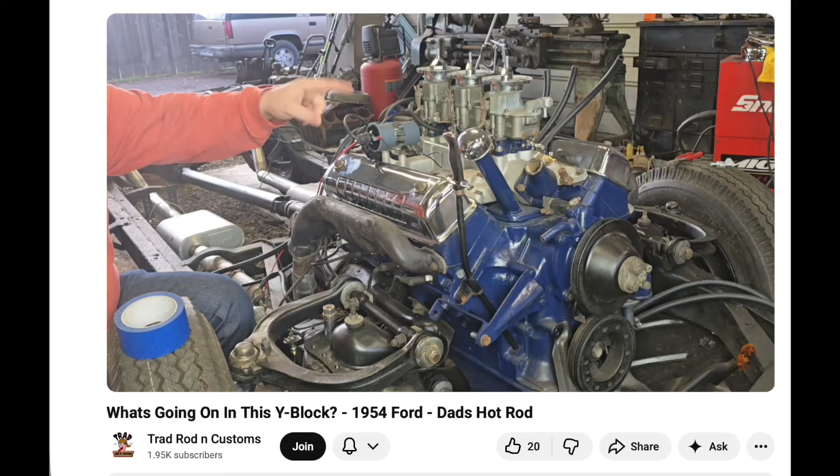That's the 239, 256, 272, 292, and 312. Maybe you've bought a truck or a car and you're trying to figure it all out. Recently, I had one of our subscribers that went through a lot of problems with the 1954 239 Y-Block he was working on. So what I want to go through is just some common issues you may run up against.

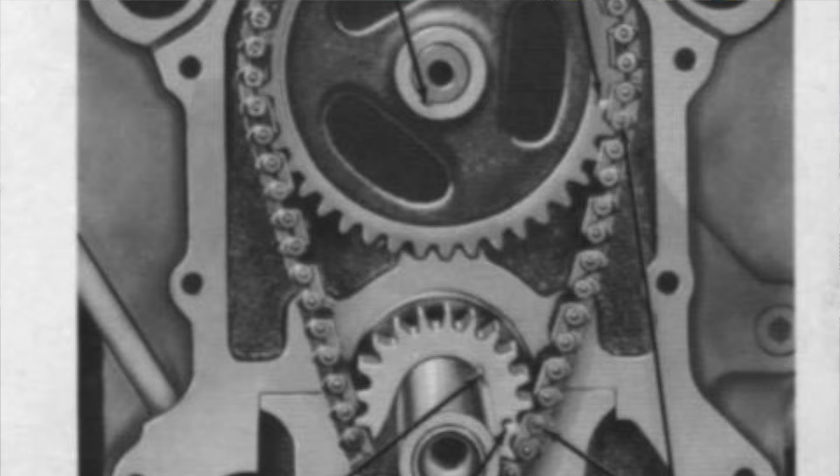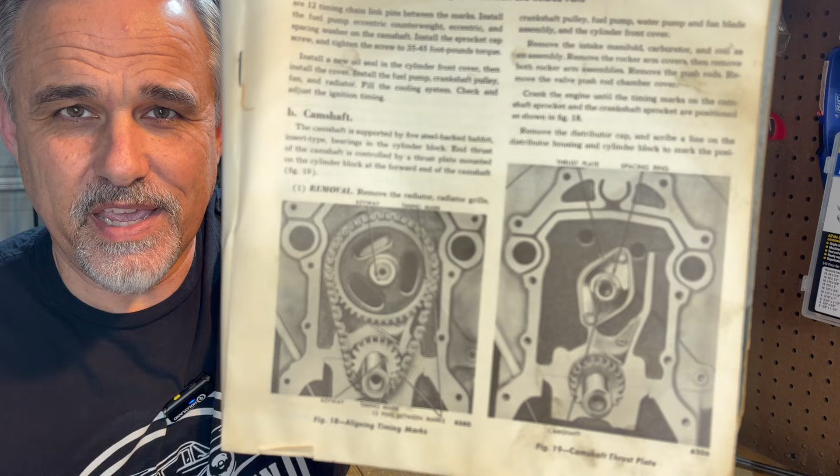Now, the first big issue with the Y-Block that a lot of people make as a mistake concerns the timing gear set. I've got a picture right here, and you can tell right there that the timing gears do not set up like a small block Chevrolet or like a lot of other V8s from the 50s, 60s, and 70s.

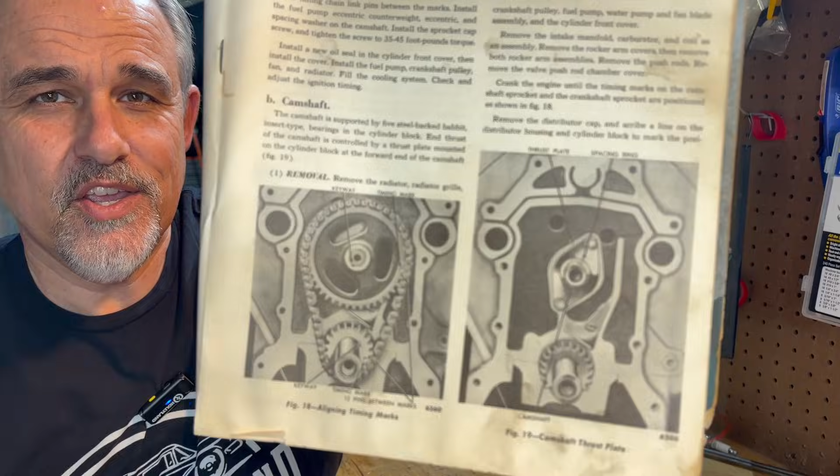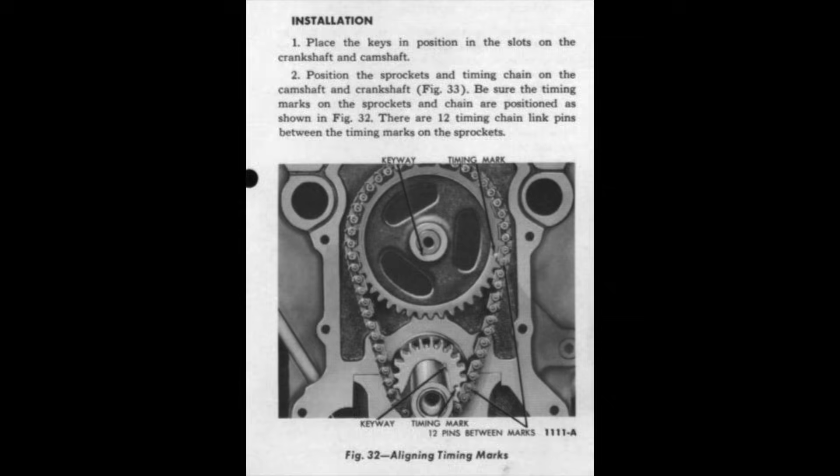You can tell where the dots are at here. Now, a lot of people will say that the camshaft gear needs to be at the 3 o'clock position. You can tell from this photo in the book that it's not exactly at 3 o'clock. It's really closer to 4 with the camshaft gear, but you can count 12 pins between the two dots, the crankshaft dot and the camshaft dot.

The mistake a lot of guys make, number one, they'll try to line up both of the dots to each other, and that's a big mistake. Second problem is they'll say, okay, I've got 12, and they won't line it up exactly like you see in this diagram.

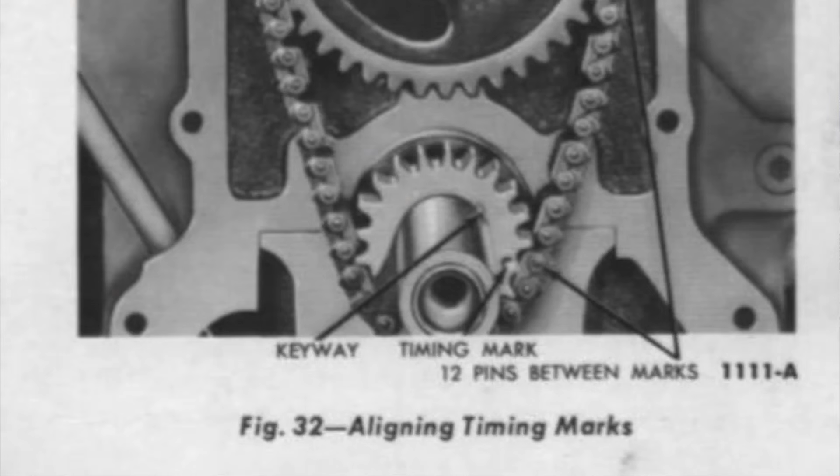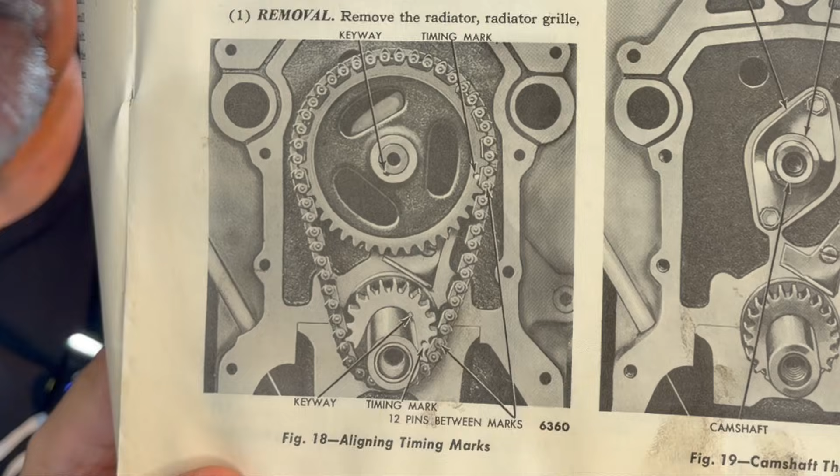Now, here's why. Let me show you this again. I know this shop manual is kind of old, but it really tells a story with this diagram. What you see here is very important. You can see the relationship of the dot on the crankshaft gear, how close it is to your timing chain.

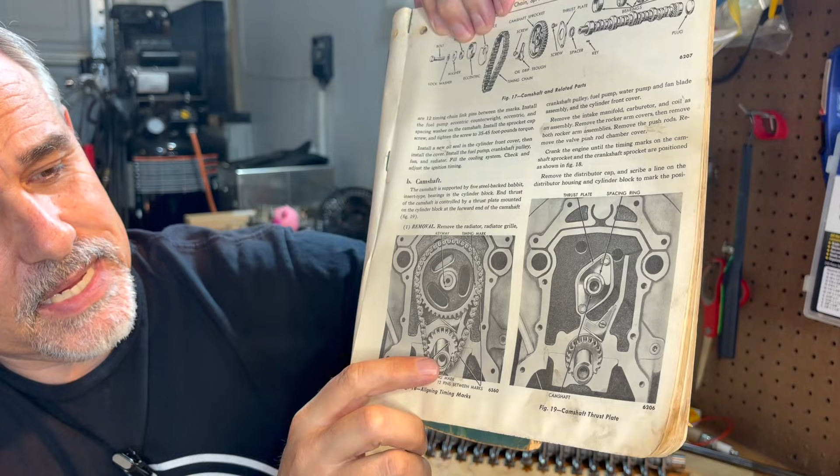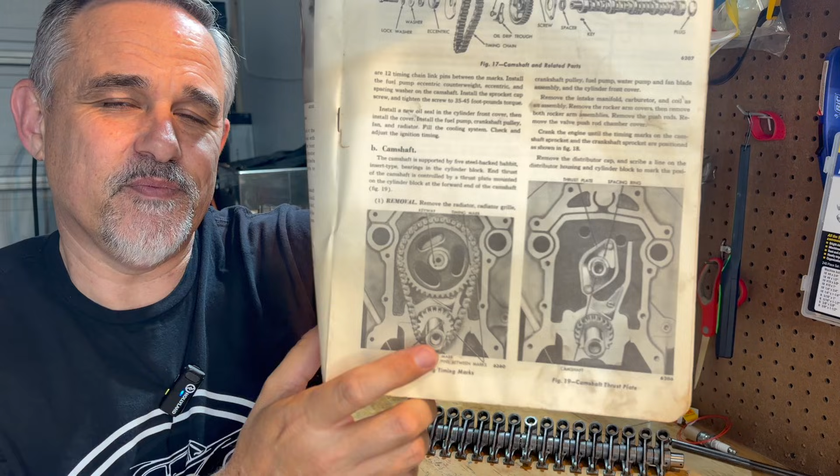Some guys will have it 2 teeth up, meaning they'll take the crank gear and have it spun up to where the dot's in a different relationship, and they'll say, I've got 12 pins. You got to make sure you're matching this up. I've seen guys have these as many as 2 teeth off, and there'll be horrible valve timing events going on. So you want to make sure this is correct.

I encourage you, if you buy a car or truck with a Y-Block that's having some trouble, feeling sluggish and not performing right, do all the normal stuff - compression test for all cylinders, a tune-up, things common to all engines. But don't be afraid to take off that timing cover and take a look at the timing set to make sure it's spot on.

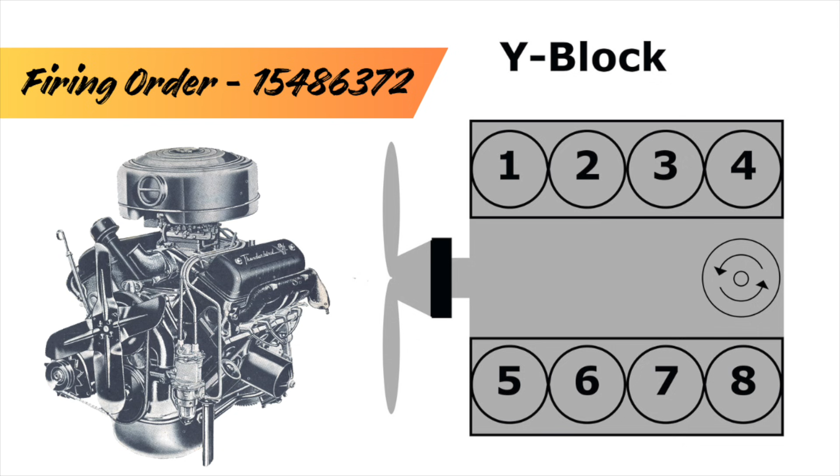One thing a lot of the early intake manifolds will have on them - they'll have each cylinder numbered, and they'll also probably have the firing order stamped right on the intake itself, to make it easy for you when you go through this process.

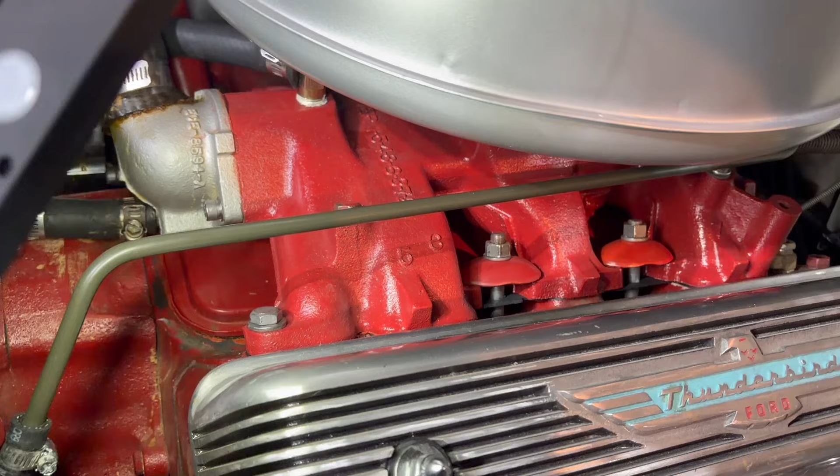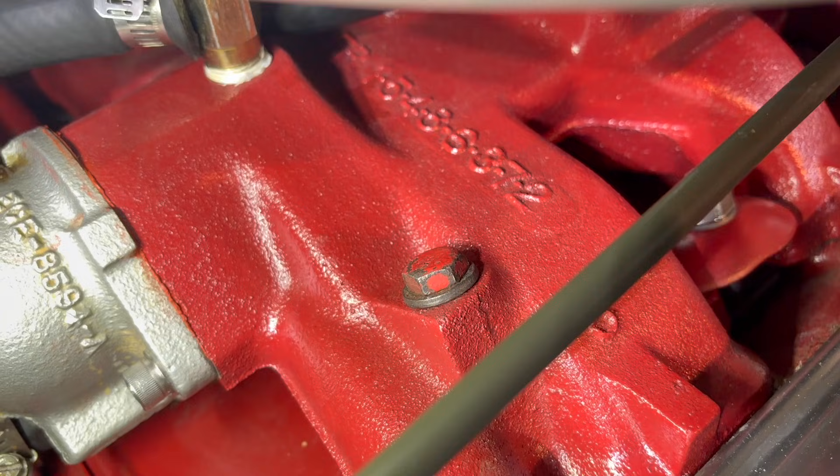Just to explain what I mean, I've got a 56 4-barrel intake here on my 292 Ford Y-Block, and I fool around with intakes and carbs, swapping stuff in and out. Number 1, you've got the firing order right behind the boss for the thermostat, it's all listed out for you, but you've also got the numbering of each cylinder.

So you see 5, 6, 7. If we went on the other side, of course, of that boss for the accelerator linkage, we'd have number 8. What gets me is that a lot of guys just miss this - they don't pay attention to what's there. Now, every shop manual from 1954 to 64, car and truck, is going to have the procedure for how to take care of setting your valve lash.

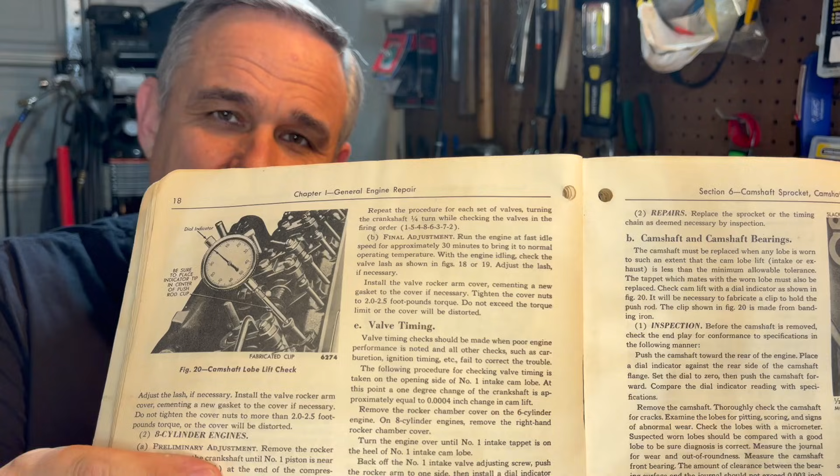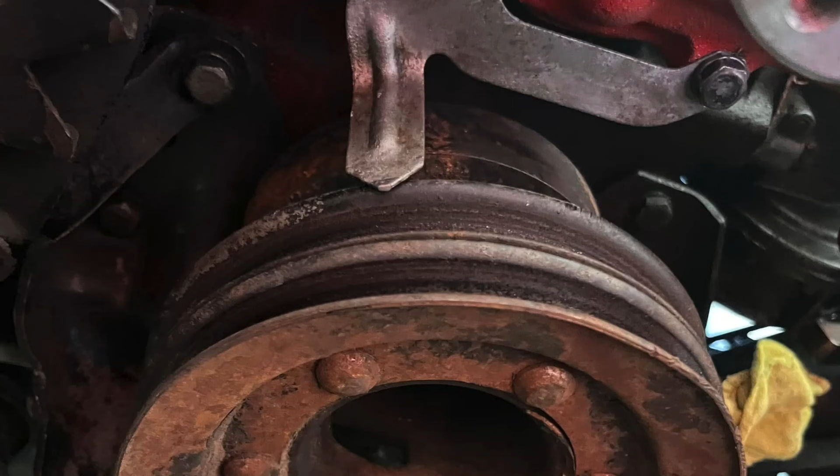So you can see right here, it's all listed out for you. I know there's no diagrams, but it kind of goes through and explains, hey, here's our firing order. Start at top dead center with number 1. Make sure you're on that compression stroke. Good, and then go 90 degrees with your crankshaft dampener. Then you're going to hit number 5. That'll be at top dead center. Adjust both of those valves, intake and exhaust. Then go to number 4. You just keep following through. But every time that you are going to set the valve lash for intake and exhaust, you would go 90 degrees on your crankshaft dampener.

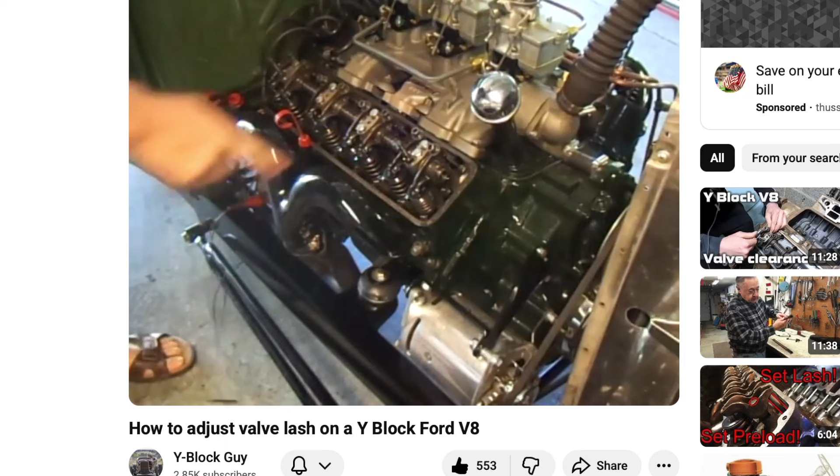Now, that's obviously one way to do it. My buddy Tim McMaster, he's got a great video on his YouTube channel. I'm going to go ahead and drop a link down here so you can watch that. It's got thousands of views. It really does a good job. He explains it very easily. But always go back through and make sure that your valve lash is set correctly.

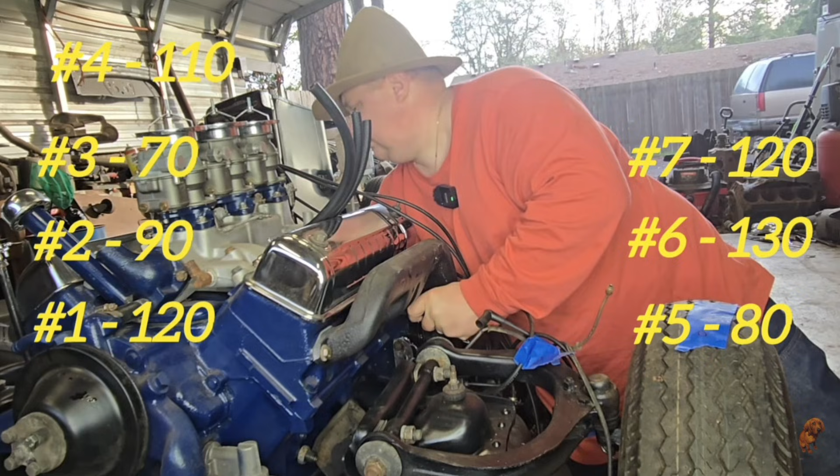Now, what gave away in that subscriber's video was just simply this. He had some cylinders that had great compression and others that were extremely low. The engine looked like somebody had done some things to it. It looked pretty clean. So it's kind of the best guess to say, bound to be somebody didn't set the valve lash correctly, and that's why you got some of those valves that you're really not getting good compression because they were set in very much the wrong manner.

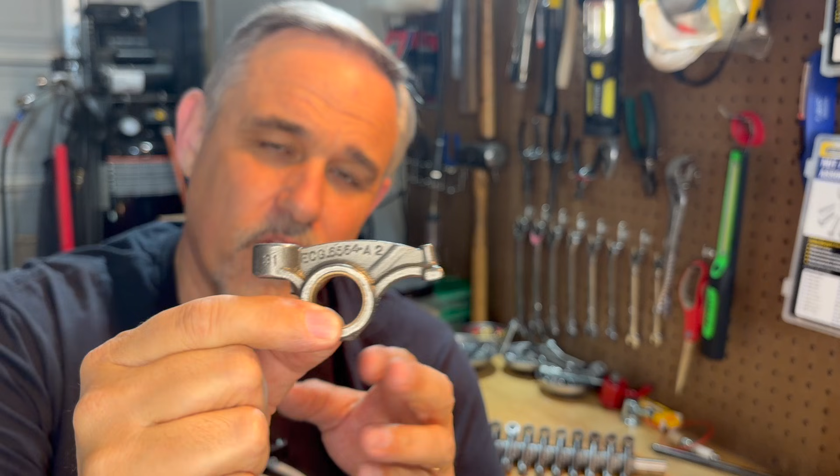Now, I've got a rocker arm here, and just so you guys know, there are such a thing as high ratio, 1.54. Technically, it's not that high compared to today's standards, but 1.54, and then all the others are 1.43. The designation is the ECG 6564. It'll be an A2 or a B2. These I've just had done at Rocker Arms Unlimited, all 16 of these. Not cheap to do, but Rocker Arms Unlimited does a great job.

But the way you set the valve lash here is you've got an adjuster. These are the one-piece jobs. They're kind of simple. Ford had a couple types, one with a 7/16 head, the other one with a 1/2-inch head. But these are interference fit. So these only go down so far, and then they'll kind of, you feel like you're kind of jamming up. You can't really do it much with your fingers, okay? But hopefully the interference will just keep this tight in the setting.

I like the two-piece adjusters. To me, I know it's a lot to fiddle with. You got a wrench that you're using, a screwdriver, but these will go all the way through, and then you just basically take your lock nut and just lock it down wherever you need your lash. These are the kind really that I prefer.

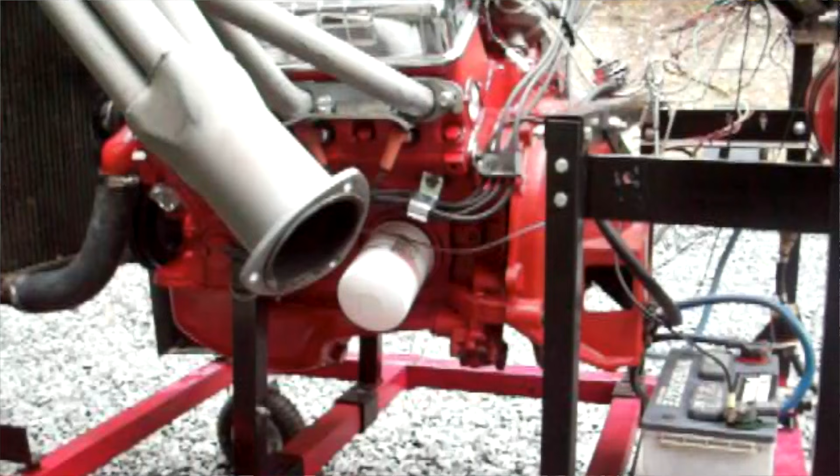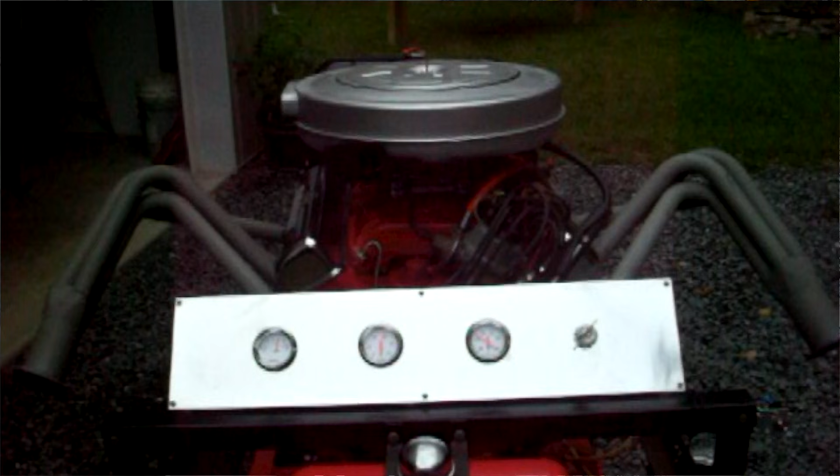All right, so if you've just bought a project car or project truck, or maybe you picked up an engine, someone's told you that it's been rebuilt, it's always best to go back through it, check the valve lash, check the timing set, make sure that whatever is installed on the engine was installed appropriately. I would even dare say, check your bearing clearances. Maybe if you don't want to pull a head or two, go in there with the bore scope into each cylinder and check out what's going on, see what happens there. You obviously want to make sure that when you get a lot of stuff together, you also run your oil pump with a drill or with a speed handle, and just to make sure that you're getting oil all the way up to the top end, that you do have oil pressure. A lot of different things can happen. You want to make sure things are set before you fire off that engine for the first time.

All right, now it's so important that we understand the basics, and sometimes we take these things for granted, but what you need is air fuel, you need spark, and you also need compression. All those things are related to the parts that have been installed and assembled in this engine before you bought it. I would encourage you to kind of run through a checklist to make sure everything is timed appropriately. That's the timing of your distributor, making sure that before you fire off this engine, you're pointed to number 1 on your distributor cap. Make sure all your spark plug wires have got the right firing order.

Do understand that the firing order for the Y block is counterclockwise. A lot of guys will get that wrong and mess that up. It's counterclockwise around that distributor cap. And then 2, you also want to make sure that with the timing, you're not 180 out. You want to make sure that you're coming up on top dead center with a compression stroke for number 1 cylinder when your rotor's pointing at number 1 for your cap.

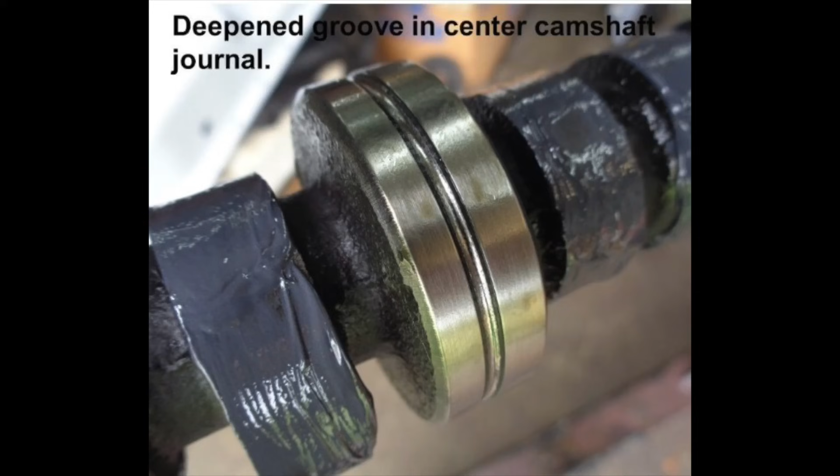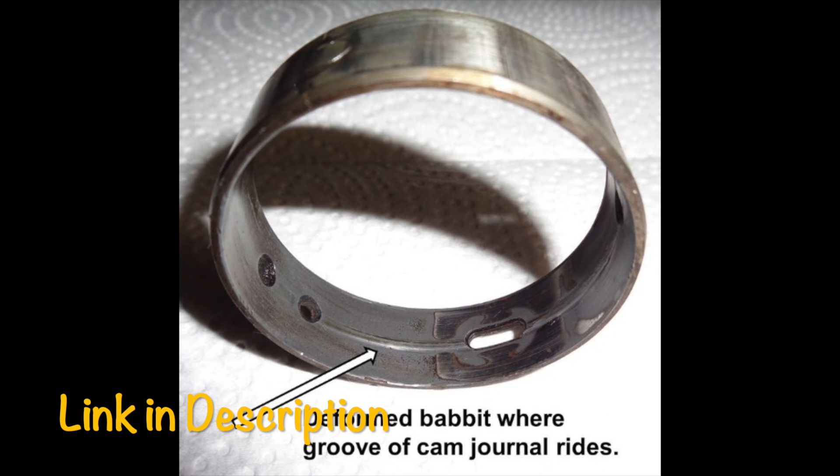One thing to remember is that Ford made 2 different types of camshaft bearings. The most common would probably be the groove camshaft bearing, and that's kind of simplistic. You don't have to rotate the camshaft at all, you're just going to get oil coming up through that entire groove and going up to both sides.

If the passages are clear, the second type that Ford made is basically cross-drilled. That means there's not going to be a groove on the inside diameter of that camshaft bearing, so technically there's the cross drill. There's 4 holes that have just been drilled through twice with 2 passages, but they intersect, so you cross drill 4 holes in that camshaft. What you have to do is get that camshaft to line up with the holes in your camshaft bearings so you can get the oil up to the top end on either side. That is important to remember.

Some guys will complain, I can't get any oil up to the top end. This has been rebuilt, and they just don't know. So the cross-drilled camshaft bearings, ironically, 54, 55, some of the 56s had them, but you get into the 57 model year, maybe late 56, you got the groove camshaft bearings.

You get up into the late 60s, for some odd reason, I don't know why, never could figure this out, Ford did go back to, a lot of the 292s, they did go back to the cross-drilled camshaft. So keep that in mind when you're trying to double check that you've got oil all the way up to the top end.

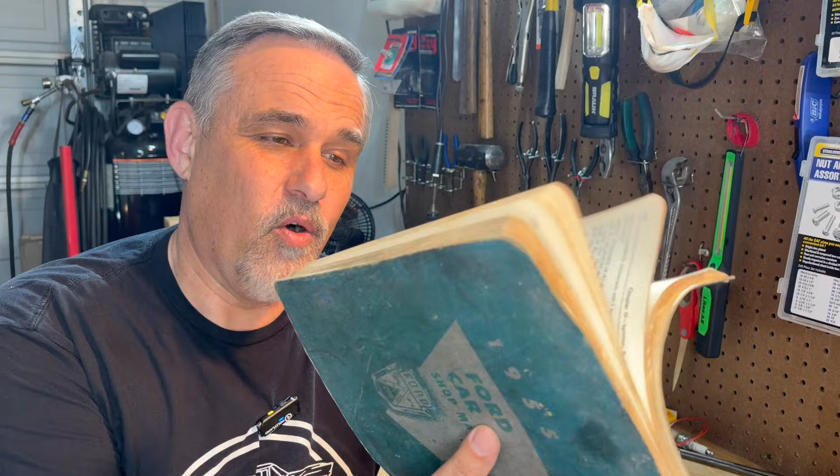All right, guys, that's about it. One reminder, if you haven't done this, I encourage you, whatever car or truck you own, buy yourself a shop manual. They're very cheap. If you're really cheap, you can pick them up at swap meets, used like this one that's really old and got a lot of problems, loose pages, but it's great. You can get a digital copy online. There's restoration supply companies that will sell them reproduction printed.

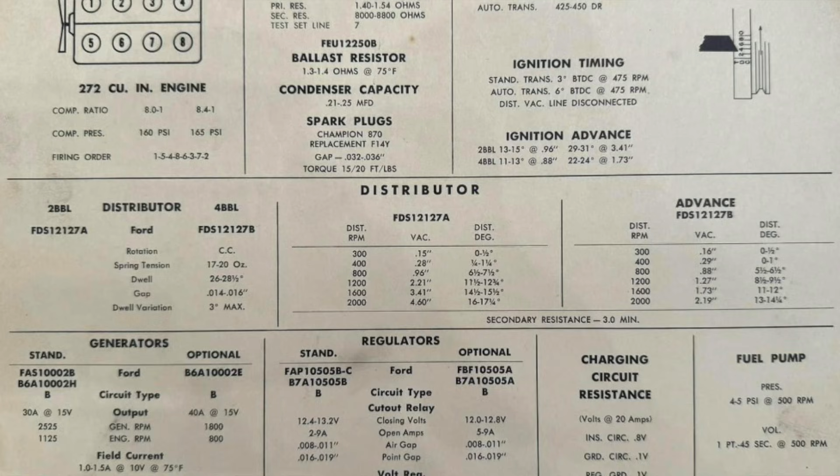It's really handy to have a shop manual. You go through all the specifications. The shop manual is not just going to have procedures for how to disassemble or assemble, it's also going to have all your torque specifications, all the measurements. We just talked about valve lash. You think about clearances, capacities, all those kinds of things. In the back of the shop manual, they'll all have those specs for you.

I encourage you wholeheartedly, get yourself a shop manual for the model year of truck or car that you have.